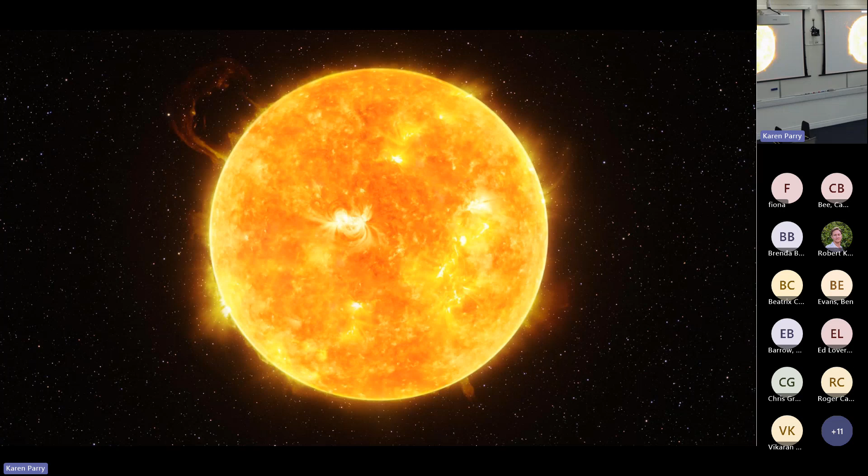So fusion, everyone knows, is the process that powers the sun and the stars. We're also all made of stardust. It's why we're all here. All the elements in the known universe, apart from primordial elements, were produced by stellar nucleosynthesis. And fundamentally, we can explain this by E = mc² as well. So it's the mass difference, or the mass defect, times the speed of light squared that is the energy released in a nuclear reaction you see in a star. And fundamentally, that's how we can use nuclear reactions, whether fission or fusion, to produce energy.

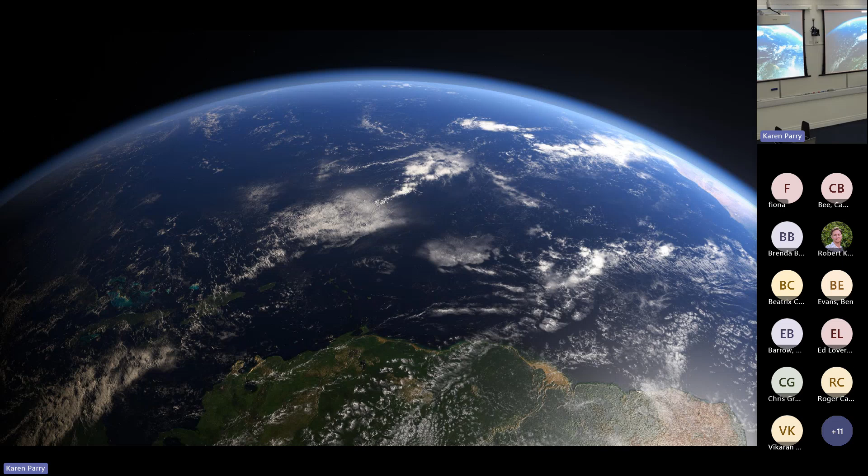So why do we care about doing fusion? Well, this thing's quite special. We've only got one of them as far as we can tell at the moment, certainly one that we can get to, and we've got to protect it. Because at the moment, we want to reduce the use of fossil fuels that fuel climate change. We want to reduce energy poverty, so bring up the standard of living, because there are some very nice bits of data out there that show the economy is massively dependent on energy. And if you've got abundant energy, then typically your country and your people are doing better.

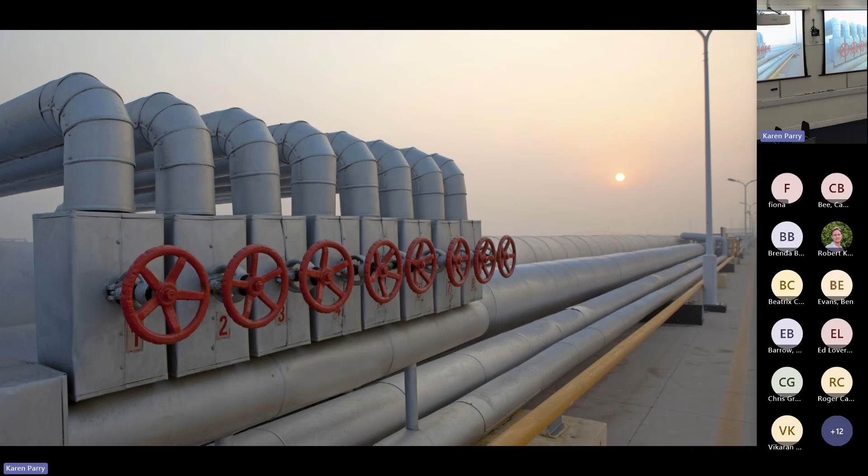This is definitely a big one now. Sorry, it's a slightly meta diagram, but energy security, which has become increasingly more important in a globalized, changing geopolitical climate around the globe. And we want to reduce that energy dependence on energy sources controlled by a few nations. So that backdrop, climate change, energy poverty, insecurity and energy dependence, is why we care.

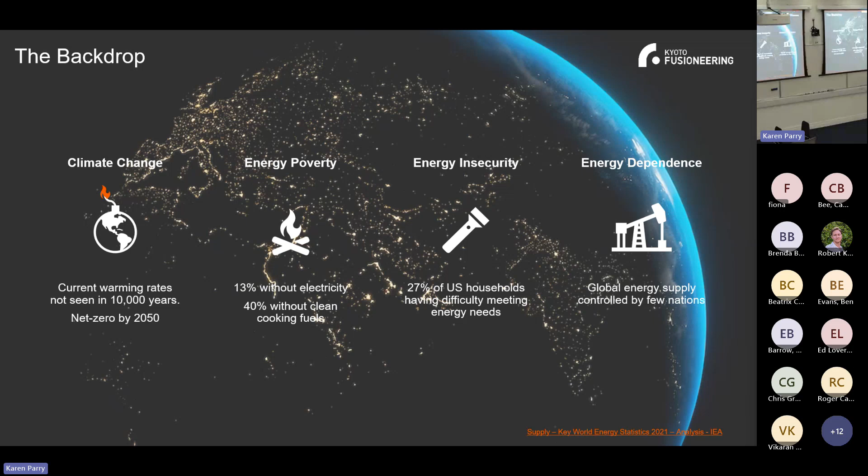But why fusion? Well, the opportunity is that we think energy consumption and economic growth can be boosted by having a plentiful source of energy, and that's fusion. Returning the carbon debt to the Earth: it's looking increasingly likely that we're going to carry on producing carbon dioxide and greenhouse gases from burning fossil fuels. There's a good chance we actually have to start putting that back into the Earth somehow, decarbonising the atmosphere. And you need a lot of energy to be able to do that.

And also we want to unleash the potential of our physical environment. I always say this technology is not the thing that sees us 50 years into the future. We don't get to fusion and go, oh, great, okay, what next? We've got to find the next thing. This is it. If we manage to crack this and we get it right, this could be the thing that sees us through the next millennia.

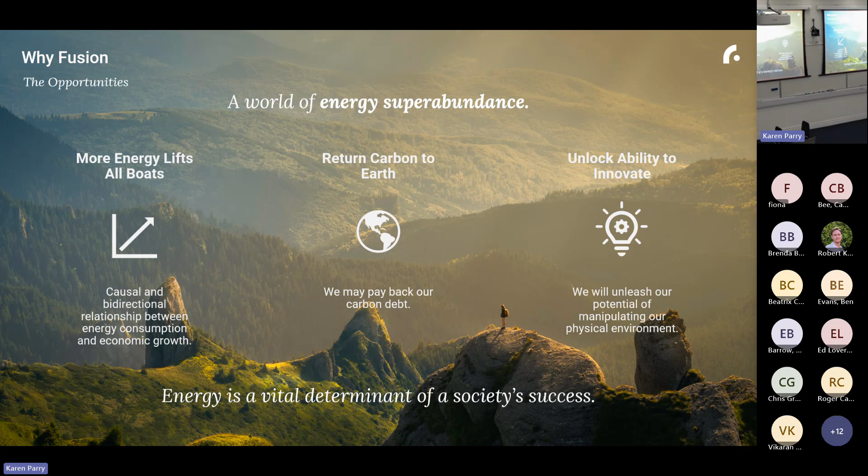So this really is an energy revolution that we're talking about. Now, that's the promise of fusion here, because we're not there yet. If we get it right, it could be dispatchable, could be clean, at least in point of use. Geographically independent, certainly to a degree. Sustainable. I think, again, these are all things that can be challenged. I frequently challenge myself. We can use it for more than electricity.

That's really important. So people talk about decarbonisation and reducing dependence on fossil fuels. Very, very hard to do if you look outside of the electricity problem. Decarbonising things like concrete production, steel production is really, really challenging to do unless you've got a huge amount of energy and process heat. Fusion can provide those things.

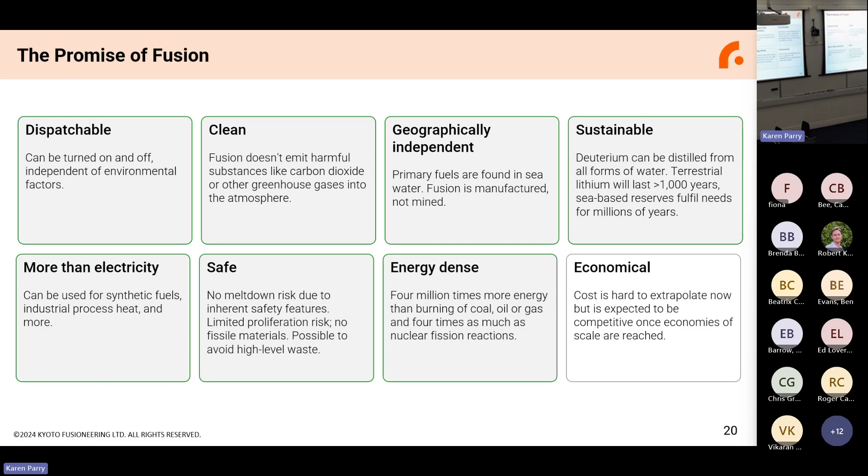It's inherently safe. Fusion's really, really hard to do, as we'll go into in just a second, and that also means it's really, really easy to turn off, because as soon as you switch off your power source, it's a passive reaction. And it's energy dense, super energy dense. So basically, you can produce 4 million times more energy than burning coal, oil, or gas, and about 4 times as much as nuclear fission per kilogram of fuel. And hopefully, one day we can make it economical, but that's very hard to say for now.

Okay, so how does it work? And maybe I can have hands up. Who is a physicist or a natural scientist in this room? Okay, so about half of you are going to have a good grip on what I'm about to say, but I'm going to go through it in lay terms and hopefully get everyone to follow along.

Okay, so we understand at school there are 3 states of matter, right? Solid, liquid, gas. Well, okay, there's a 4th one. If you heat up a gas, superheated gas, you can turn it into a plasma. This is where the ions and the electrons of atoms dissociate. These are probably LEDs, aren't they, realistically? But anyway, these are plasma lights in the ceiling. Let's just assume that is a plasma.

There are plasmas everywhere in the world, and we know quite a lot about them, but fusion plasmas are a bit different. So when you have a fusion plasma, you have to heat up the fuels to overcome a Coulombic barrier and actually collide together. So when you produce a plasma, you get this sea of ions and electrons, and this is actually charged. So you can act a magnetic field on it, and you can control what this plasma does.

Now in fusion, what you've got to do is create a plasma, and you've got to have that plasma last for long enough, you've got to get it hot enough, and you've got to get it dense enough so that reaction will happen. And those 3 levers, hot enough, long enough, dense enough, you can pull any two or three of those levers to try and get the reaction going.

Now what we've been trying to do on the Earth for the last 50, 60 years in fusion is try to get it above a certain level, which is about 3 times 10 to the 21. The product of these three things, a so-called triple product, has to get above a certain amount so that you have more energy coming out of the fusion reactions that you create by making it hot enough, lasting long enough, and getting it compressed enough to make fusion happen. And you need to go a lot above that to then get way more energy out than you're putting into it. Did I explain that well?

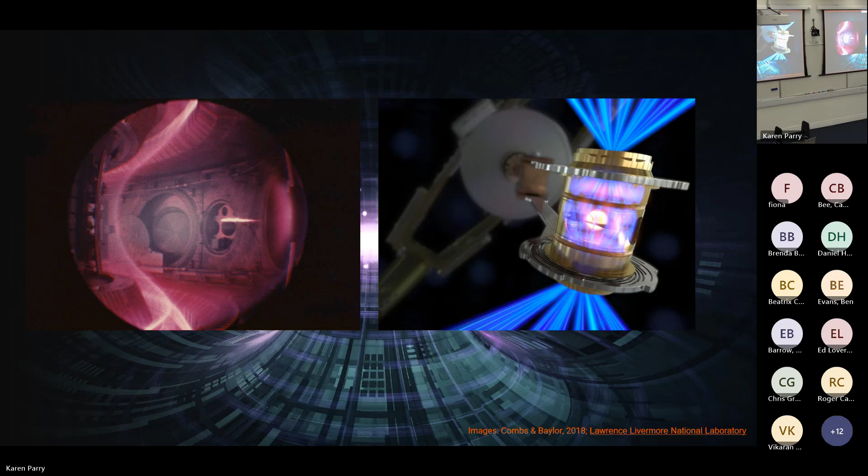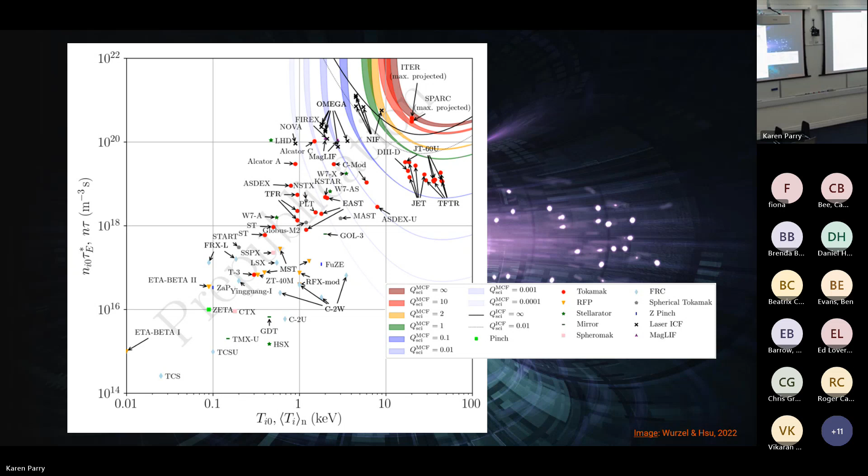Now, getting past that point has been regarded by someone that I know at MIT, Professor Dennis Whyte. Some of you may be familiar with the name. He calls this the Wright brothers moment. This is the moment the wheels are off the ground, that we know flight is possible. This moment of getting more energy out than in is that wheels off the ground moment.

Still a long way to go until we've got a commercial airliner, right? The Wright brothers didn't fly their first machine and go, great, now we're going to build a Boeing 777. They had to go a long way to get there, but it showed that it was possible to do it. So it's a really important moment.

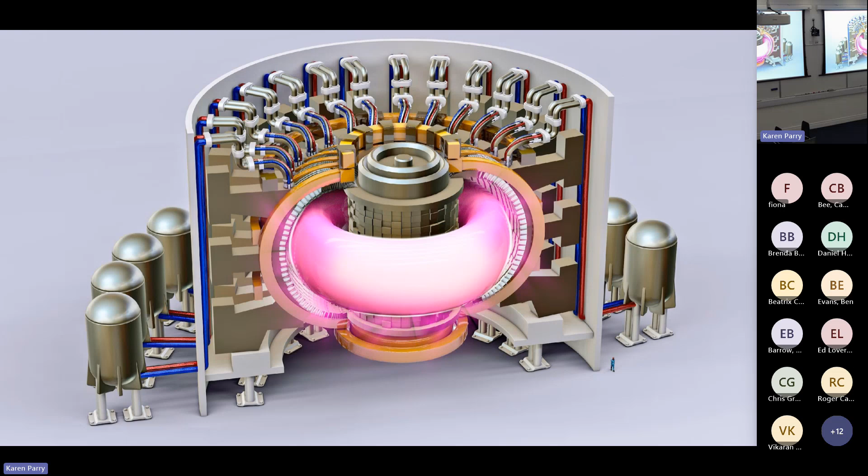And this is a device from 1954, I believe. This is something called the Zeta machine, which was based at Harwell, I believe, just down the road. And this was one of the first machines that produced some really good results. Then they moved on to tokamaks, which is a Russian name. I'm not going to pronounce it because it's really, really challenging, but it's four different Russian words combined together. And this got adopted as one of the best configurations for doing plasma confinement from a magnetic confinement approach because it was getting good early results.

And we ended up with JET, which some of you may have seen. If you haven't, please go visit JET at Culham down the road, which is an amazing thing to see, although it is now actively being decommissioned, whereas it ran for a very successful campaign for a long time. And finally, we got to this idea that actually let's keep building tokamaks, and we came up with this, which is a schematic of something called the ITER project.

So ITER is a tokamak based in the south of France. This is a tokamak that involves China, Russia, the US, Japan, South Korea, the entire European Union, sort of the UK a bit at the moment, but not really, but kind of, yeah, we put a lot of money into it, but we came out of the agreement, so we're working out ways to get back in. And basically, it's an international project, a little bit like the space station or CERN.

It's a science mission, but this was formally the way to get to fusion. That's important, because I'll come back to that later. So this was stipulated to be the pathway to fusion. We've got to go via this machine, then we're going to get to the next phases. Okay, so this was essentially going to do that Wright brothers moment, magnetic fusion.

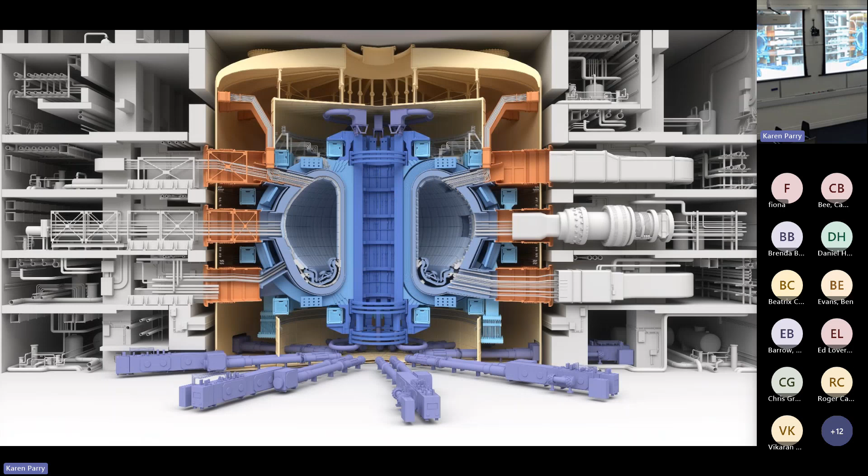But currently it's not constructed, and it's currently due to go first plasma in about a decade from now. And it was originally due to be first plasma in 2008. So it is a project that is about 30 years delayed. Bit of a problem when you're trying to move fast.

Enter something else exciting: the laser side of the house. As I said earlier, they're trying to get to really high density, high temperature plasmas. In 2012, they ran the first shots on something called the NIF, the National Ignition Facility in the US, in California. This facility was supposed to provide that Wright brothers moment in 2012, and it missed it, and it missed it again, and it kept having problems, and there were delays, and so on and so forth. Hold that thought for a second.

So where are we at in terms of making that progress? Remember that graph I showed earlier with the progress? This is kind of the wishy-washy plot showing we've made real progress towards that point of fusion power break even, that Wright brothers moment. Then since then, we started building the ITER project. When NIF got delayed, things went a bit slow, a bit stagnant. We stopped making that progress towards fusion power break even, and we started to stall.

That is until 2022, when the US Department of Energy, by the NNSA, announced that they had achieved this break even on the NIF. So a decade late, but they'd done it, and it matched the models. And they did it again and again and again. I've spoken to Tammy Ma, the director, and she says they've done it again and again and again, actually. So they've done it 7 times now, all with planned experiments, getting the results they expected.

And I think the latest results actually see them get something like 2.7 times more energy out than they put into it. And you're thinking, great, so we've done fusion, that's it.

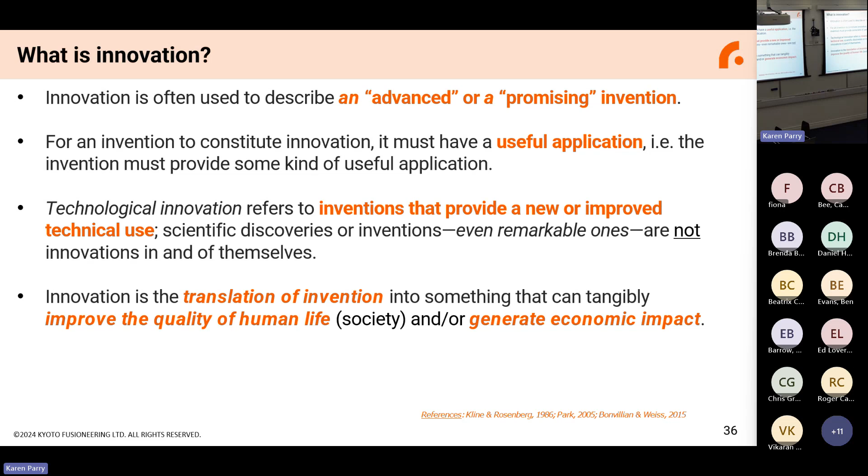So what does technology to market look like? We're charting the path of technology to market—it looks linear, right? We go from science to technology, to application, to market. Typically you have to overcome several peaks, where there's a lot of effort and money you've got to put in to prove that your technology can stay within the laws of science and that it works.

Then we say, well, we've got our technology, and we think it's got a really useful application. You run an experiment, do that again—another uptick in resource needed there. And then finally, you show that you can make it commercially viable. You have to put a lot of work in to make it economic. That's the typical process of diffusing technology to market.

Now, it looks like a linear process, but in reality, if you look historically at all innovation throughout history, it's dynamic. This should be viewed as a dynamic system, not a linear process, because there are feedback loops that link from all stages.

This seems very obvious, but a lot of people haven't thought about this when actually deploying stuff in the real world. In a successful fusion innovation ecosystem, you need to understand the requirements of each part of the innovation ecosystem, who the actors are—public, private, supply chain organizations, regulators, etc. There are also processes at the front end, the R&D side, and the back end, the application and market side, and you need to think about how those drivers impact other parts.

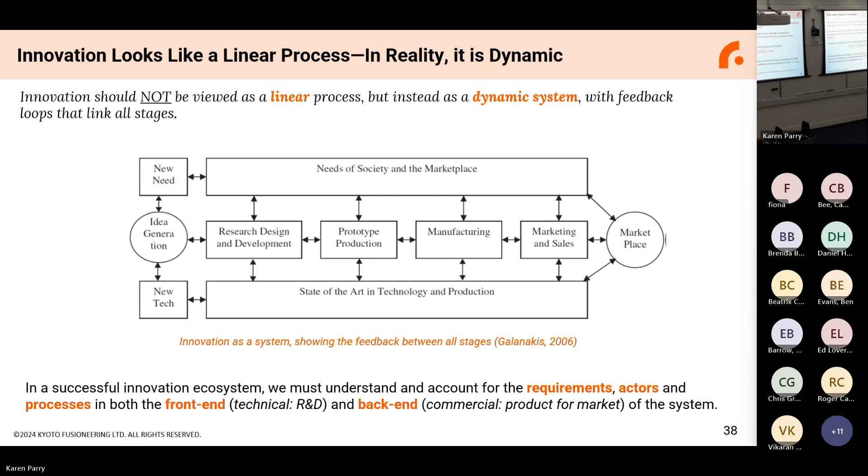As I said a moment ago, historically, advanced technology missions that had a high degree of technical risk but potentially high societal reward were developed on a linear model, more or less. These missions are almost exceptions to the rule because they required significant investment, and the goal was often not commercially oriented.

So money and time had to go into things like the development of nuclear fission, which was really a bit geopolitical at the time. Certainly the Apollo missions, and also the internet, interestingly, came out of DARPA in the US, with roots to Oxford in the UK as well.

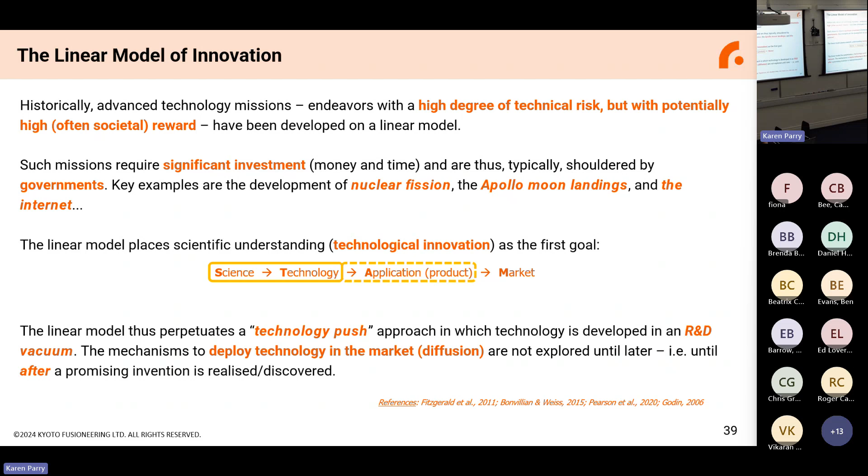Fundamentally, what happens is you go from science to technology and you have what's called a technology push approach—you say, I've got this thing, it can do this, and we need to do it. So we've got this thing, we can land it on the moon, and then we've done it, which has now spawned an interesting commercial space race. But that took a very long time to materialize. They still did the thing—their mission, their application, was landing on the moon. In that case, that was the innovation: the US getting to the moon.

So how does this apply to fusion? What I contend is that, whilst fusion has been the subject of major R&D for the last 70 years - 1952, I think we really began looking into fusion, but that was actually a little earlier if you look at some of the fundamental physics that went on before.

National labs ran the show. Private fusion companies didn't really exist - I'll come on to that again a little later. But naturally, those labs are going to be geared towards the front end of the innovation, right? They're going to be thinking about research and development to prove the science, and to understand the technology in more detail.

They were not thinking about commercialization, and that's fine, that's okay. But with those focuses being on that fundamental research and some of those mission-led experiments, including the likes of the ITER program - you see on the right here, another schematic - that was the primary mission.

It was, okay, well after we've done that, after we've done ITER, after we've proven NIF, we'll then start thinking about the next stages. We'll start thinking about those applications. We're not going to design this for those applications - this is a science machine. It's going to prove the science, we're going to understand some of the technology, we're going to progress it along. And then later, someone will come along and innovate, and we'll do it that way. So it's very much on the linear model.

Now, what I contend has happened over the last decade or so, and I think we're still in it but we're at the tail end, is that we've undergone a paradigm shift. Over the past decade, we've seen this science-driven model challenged by the emergence of 40 privately funded fusion companies. These have raised collective billions of dollars in investment - I'll show a graph shortly. And they promise to basically rapidly commercialize fusion technology. Now, rapidly in this sector still means probably decadal, but interesting. It's more interesting, in my view, what they've done to the state of the sector.

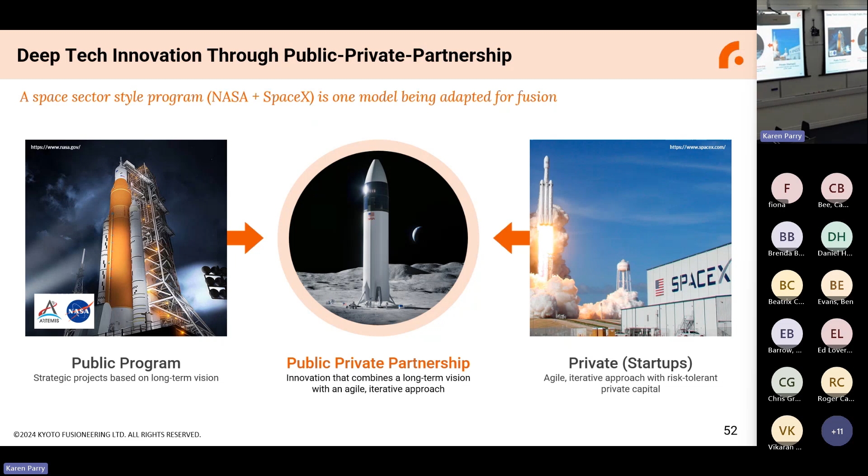But I think public-private partnerships, in the US in particular, but certainly elsewhere, in China too - these two bleed into each other anyway - the public program and the private companies are starting to work together under official frameworks as well. So something called the milestone-based program in the US, and it's modeled on a space sector style approach where NASA and SpaceX work together on the NASA COTS program to try and get innovation happening faster.

Different governments have got different approaches, but the UK, the US, and Japan have all announced new strategies for fusion over the last couple of years. China's also got one too, and you'll be unsurprised to hear. Governments have adapted. They've started to realise the private sector can't be ignored, and the public sector should be leveraged for the benefit of fusion energy as a whole, the benefit of their nations. And these countries are all working quite closely together. This has stimulated a lot of international collaboration. There's an official partnership between the UK and the US, a collaboration agreement between the countries.

One is coming with Japan, I keep getting told, but it's been about a year since I was told that, so still waiting to see what happens. I think the number of elections on both sides have caused a slowdown. And there's actually a summit in Italy next week with the G7 specifically on fusion, so we'll see what comes out of that.

Unfortunately, with that collaboration also comes competition. So the US and China are starting to draw swords on the fact that one of them wants to get there first. They're not sure which one it's going to be.

So is there a new space race going on with fusion? Or is it more like the race to get the vaccine? I wanted to look at this through two lenses. Firstly, through the geopolitical lens: fusion's going to turn into a race internationally. Will we develop it more like the vaccine, where it's actually, let's all get this together, let's all work on this, push in the same direction for the betterment of humanity? Or will we actually end up competing and trying to have primacy as an energy technology? Because this could be the thing that controls geopolitics around the world, just like oil does today.

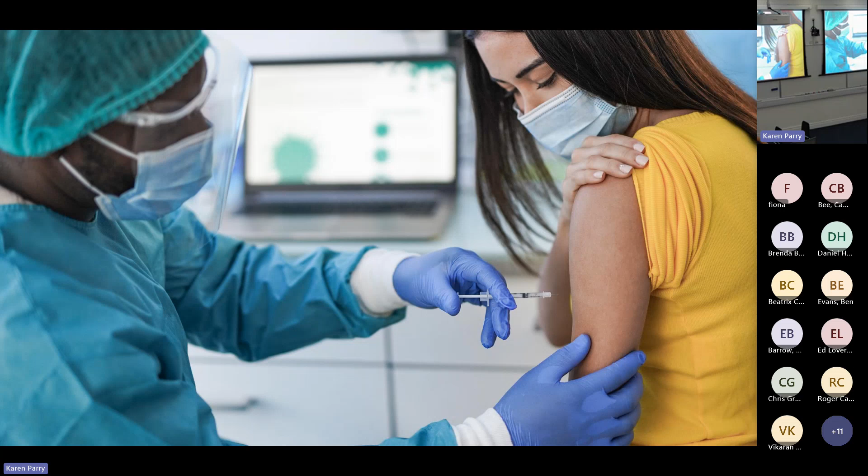They started working out how to get jabs in arms, how to mass manufacture things, how to get licensing done quickly, while they were still testing the efficacy of the drug in the first place. They weren't sure those vaccines were going to work, but they made sure that if they did, they were ready to go. And that's kind of what's happening in fusion now. So there's a couple of interesting lenses to look at: there's a geopolitical lens, and there's the mission itself and how we approach it. And again, I sense fusion is a bit of a geopolitical race right now, certainly becoming so, but also that this is not necessarily a bad thing for the innovation ecosystem as a whole.

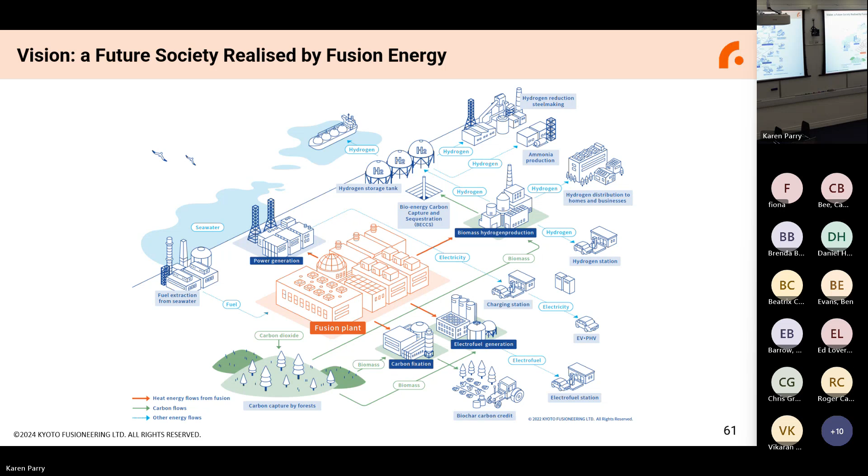We think producing things like hydrogen for everything from ammonia production all the way through to hydrogen reduction in steel making could be important. We think looking at biomass gasification, where we're actually taking carbon out of the atmosphere, could be important. And there are various routes in which we think fusion can have a major impact on humanity.

Our mission is to enable the fusion energy era. So this blue bit in the middle is NIF, it's ITER, it's whoever's developing a plasma. We aren't developing our own plasma. We're working on the bits on the outside. Probably the most instructive piece. Oh, and I should say, principally, these can be divided into 3 areas.

Plasma heating systems. So this is the only area of our technology that's magnetic confinement specific. So if anyone's working on a magnetic device, this system's relevant. If you've got a laser-based approach, this thing isn't going to help. I'll explain why later. And then also the thermal cycle, this is how we actually take energy and make it useful, use the energy for hydrogen production or something. And then the fuel cycle system is the piece that actually fuels the engine.

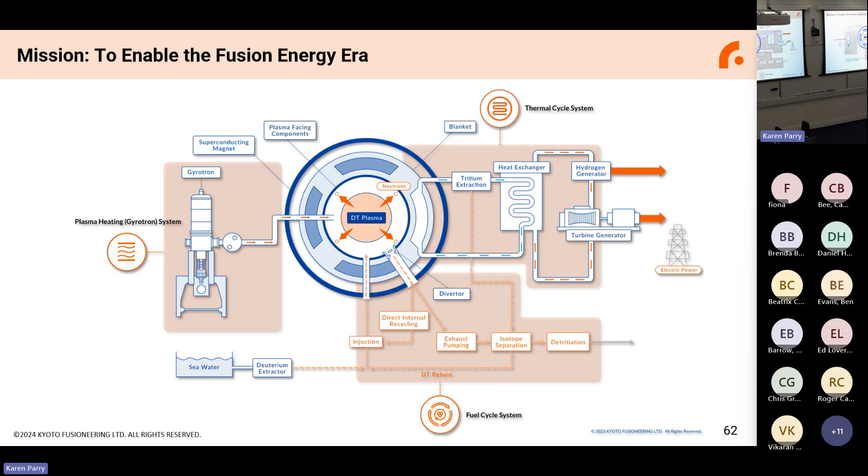Now I've got an analogy here for you, which is the first time I've tried it publicly, but I have used it privately a few times and it seems to have resonated. So I hope this is going to help you understand what we do. So think of a car engine, or rather the exploded BOM of a car engine. So that's bill of materials for engineers in the room, not bomb as in B-O-M-B.

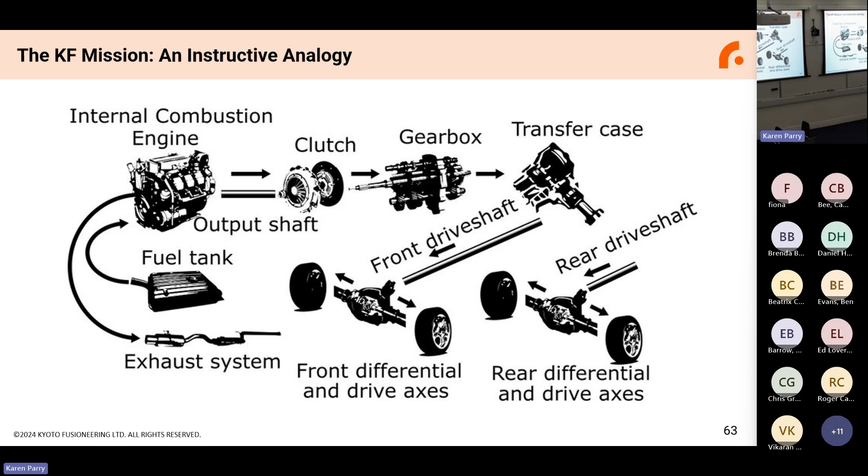So what you have is the internal combustion engine. And then you have things like the clutch, the gearbox that make up the drivetrain, and then you have the chassis, the exhaust system, the fuel tank, and yada, yada, yada, and all the bits in between. Right? Let's think about fusion as a car, and this is one of my favorite cars, by the way. I'm a big fan of cars, and it's a Japanese car, so there's a link there as well somewhere.

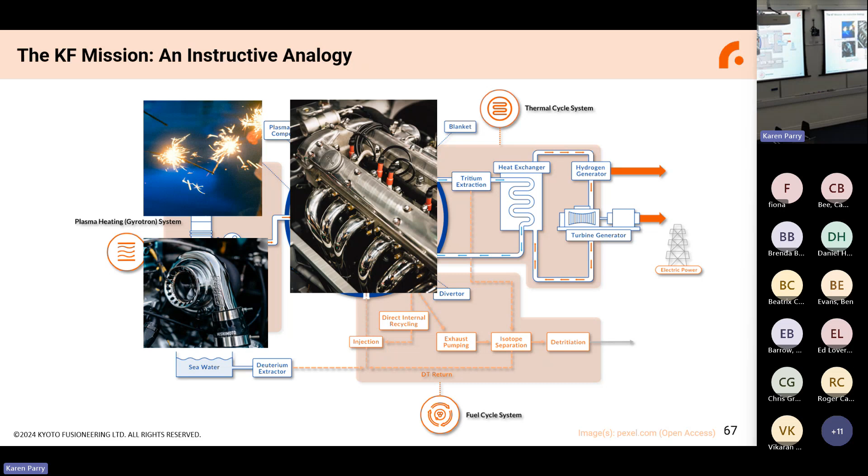So if that's the engine block, then this piece over here will be kind of like the spark plugs or the turbocharger or the air intake. Okay, this is the bit that provides the energy to the engine to get it going. Okay, you have to stretch the analogy a little bit because, of course, we don't have spark plugs in fusion. We have a plasma. We actually have no air inside fusion systems. They're normally vacuum chambers, very, very low pressures.

Thermal system, that's your gearbox, your drivetrain, probably your chassis. Maybe a diff, right? Okay, this is the bit that actually transfers the power to the wheels, so you can actually operate your car, make it move, and make it do useful work, right?

And the final piece, quite obviously, and sorry, these are all the free stock images I could find today of a rusty old exhaust on this one, an exhaust and fuel tank, and basically this is how you fuel and inject the fuel and exhaust the fuel from your fusion reactor.

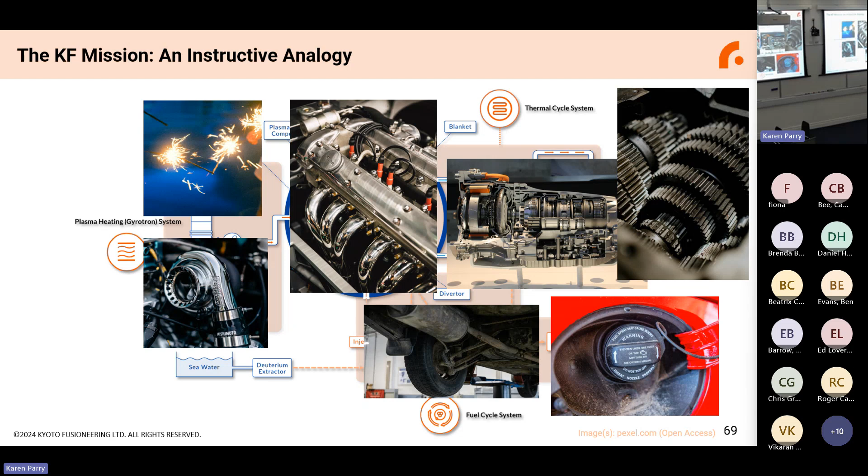So what you've got there: engine, fueling the engine, exhausting it, taking the engine, the useful work, and doing something useful with it, making sure you've actually got the ability to ignite the fuel in your engine in the first place. So that's what we do as a company. The only bit we don't do is the engine.

And before I get on to what our business model is, again, this was something that I was forced to do when I started doing my research, because as an engineer, you think you know what a business model is, and then you go and read about it, like, yeah, this is more complex than I thought it was. So I'm going to do a couple of definitions of business models for you. The business model is a plan for the successful operations of a business, identifying sources of revenue, the intended customer base, products, and the details of financing.

This is important. There's a lot to unpack, and I'm not going to do it now. You've got to make sure that what you're making is actually needed. You've got to make sure you can actually make what that thing is, and you've got to be able to actually fund it as well in the first place. So you've got to link these things up, as I said earlier. This is what private companies do. We are not here as a research organization. We are here to commercialize research.

Now, why is it important? Well, getting the business model and technology strategy right in the context of something like fusion is important, because to actually achieve something commercially viable, you've got to have a competitive advantage over your competitors and over the market. And that's what we think we have. Because what we do is we're running perpendicular to those in the sector.

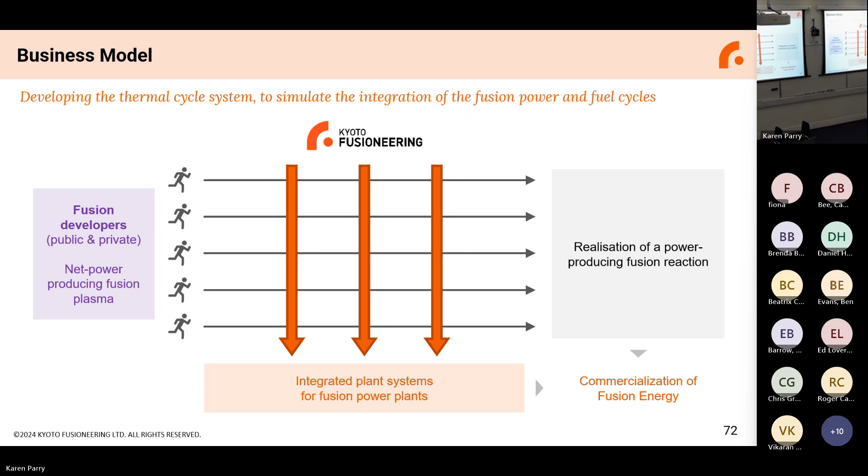So in simple terms, if you're a plane company, we're making the engines. If you're Boeing or Airbus, you don't make your own engines. Rolls-Royce or GE make them for you because they're the best in class. And they collect their supply chains to supply all the turbine blades and materials and filters and so on to make that happen.

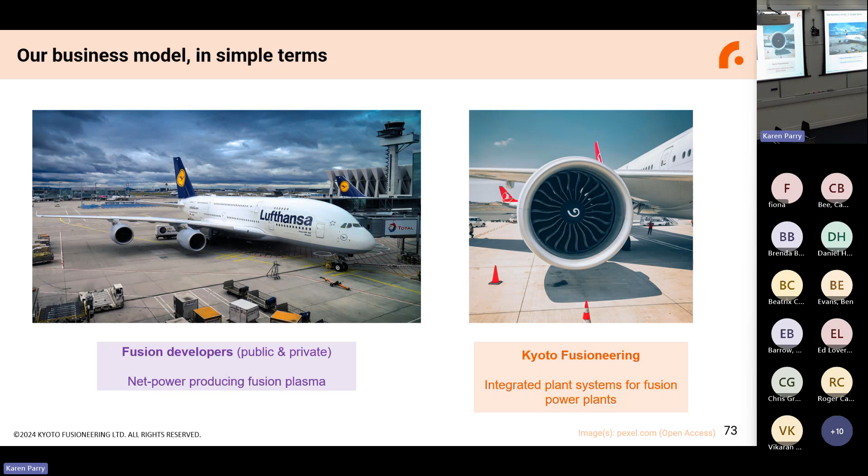So part one, this piece, the spark pluggy bit that I spoke about. Now, a gyrotron is a machine, a piece of kit that you can use to heat a plasma. So you can heat plasmas through something called electron cyclotron resonance heating. So what you do is you fire microwaves at a certain frequency at high power into a plasma, and you can transfer the power from that microwave beam into the plasma, into the electrons.

You get the frequencies right, you can heat up those electrons enough such that they're so energetic that they can pass their energy onto the ions in the plasma. Those ions in the plasma are important because if you get them to a high enough temperature, you can actually get the temperature of the plasma to make fusion happen. So you can see how important this technology is. Now, there are other methods of plasma heating. This is not the only one, but we think this is the one that can be most efficient.

And we're very lucky, our CTO is the world's leading plasma gyrotron specialist. So we're very happy to have him on the team. His name is Keiichi Sakamoto. We are already selling these technologies. We've sold 2 to the UK National Programme and 1 to a private company in the UK. We have gyrotrons at various frequencies, about 1 megawatt output power, and a wall plug efficiency of about 50% at the moment.

We can go all the way up to continuous wave operation on these. So we have these as products available now. If you actually are interested in buying a gyrotron, please come and order. But please bring your checkbook and we can talk.

But fundamentally, we have sold 8 of these so far. So this is the majority of our revenue because this is what the market needs today. So we've taken a technology that we knew would work, and we had the understanding of. To actually take that to market was more challenging. You have to jump through qualification hoops, you have to do quality control, you've got to get your supply chain organized. But now we have a very robust setup to be able to sell these into the market.

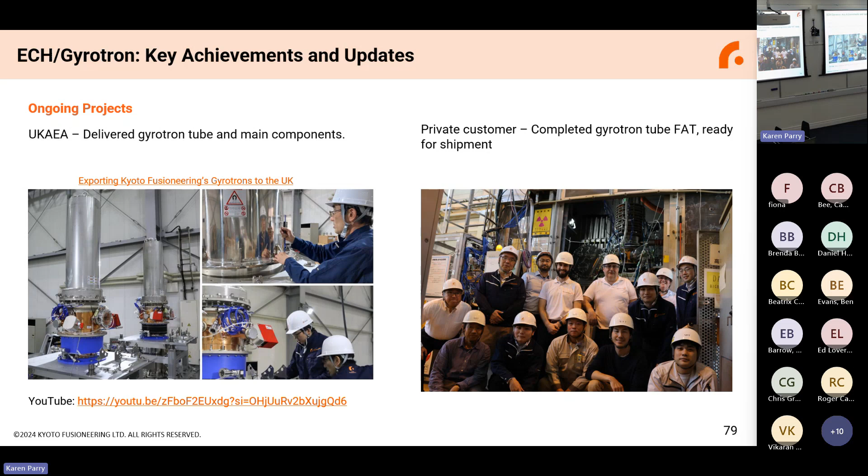We're also working on the R&D side. We've done some high voltage power supply R&D in Japan, working with a Japanese company, Nichicon. And we're also now working on a higher frequency gyrotron. So if you know some of these companies around the world that are looking at these high field devices using stronger magnets, if you go to strong magnetic field, you typically need to go to much higher frequency of gyrotron, so possibly upwards of 300 gigahertz. Now, at the moment, that's very challenging, but we're looking into ways to be able to increase that frequency to see if we can actually heat high field plasmas.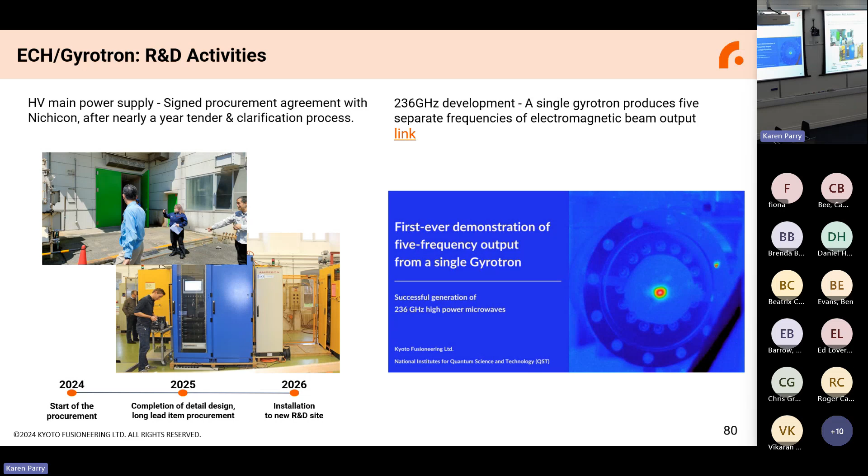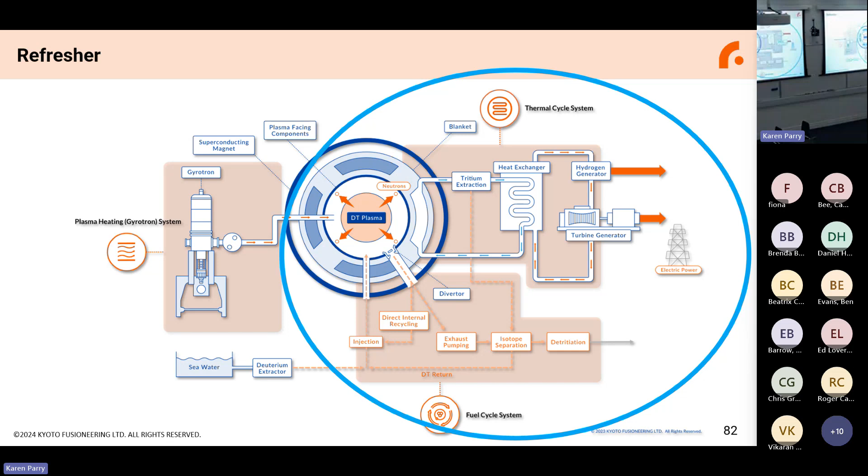So that's the first part. Second part, I'm going to group into one because they are very much overlapping. So this is the thermal and the tritium fuel cycle piece. And what we've got is something called the Unity program, which I hope you're going to love. So remembering this is this piece, and just for reference, it's that drivetrain, powertrain, power delivery, useful work, and the fueling piece. But first, we're going to take a step back, and I am actually going to teach you some fundamental fusion engineering here because I think it is important.

So I talked earlier about a fusion reaction, and we're going to get a little bit more detail here. So I didn't mention the specific fuels, which in fusion are deuterium and tritium. Now, the reason they're deuterium and tritium, you can ask me afterwards if you're interested, but fundamentally, these are the easiest fuels to do fusion with. So we make fusion happen, yay, by some form of magic, and then we produce helium and a neutron. Now, the helium remains within the plasma because it's a charged particle. We have to exhaust that out through something called a divertor in the magnetic fusion device. In a laser machine, you still have a cavity chamber that you still have to get it out of.

But anyway, this is the important bit for us as a company, because anyone dealing with the plasma has to get that out and actually use the energy from that in the plasma for their concept to work in a certain way. Okay, but this piece is uncharged. Neutron is an uncharged particle, so it will go anywhere. And this goes out of your plasma and into something called a breeding blanket. Now, does anyone know what a breeding blanket is? Okay, there's a few in the audience.

Right, so what a breeding blanket does, when we talk about how fusion could be a self-sustaining fuel forever, the breeding blanket is the thing that does that. At the moment, you're burning fuel, and you go, well, where's it gone? How can this be sustainable? Well, this one is 1 part in 6,700 atoms in water. So, my water on the table, there's a lot of deuterium in that I could get. That one isn't. We can produce it from lithium.

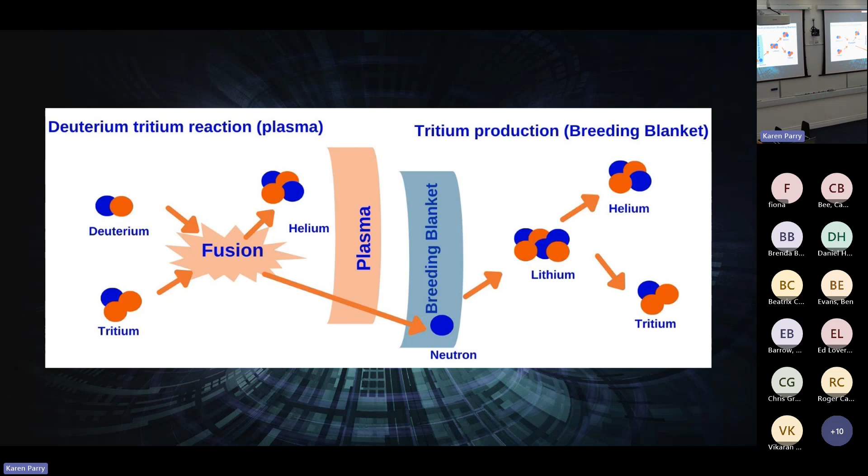Fundamentally, in graphical form, this is how it works. Well, who did that? That's wrong - that should be helium-4. Sorry, that's not me, this is my colleague. I'm showing my hand that I didn't make these slides, but I really like them. So other than that, they're really good.

Now, this tritium piece is a critical path challenge for fusion. It affects every single major system, and it affects performance, safety, and cost. Every time you want to move fast in fusion, tritium will be the thing that applies the brake. You haven't got enough of it, you can't produce enough, it's too expensive to get in the first place, it gets trapped in materials, and so on. We can go through those if you're interested.

It's not something you bolt on either. You hear a lot of people in the fusion sector saying, oh, well, we'll do the fuel cycle afterwards. No, this is integral to the operation. It's not an afterthought. It affects how your plasma operates, it affects which materials you can choose, and it affects how you design your breeding blanket.

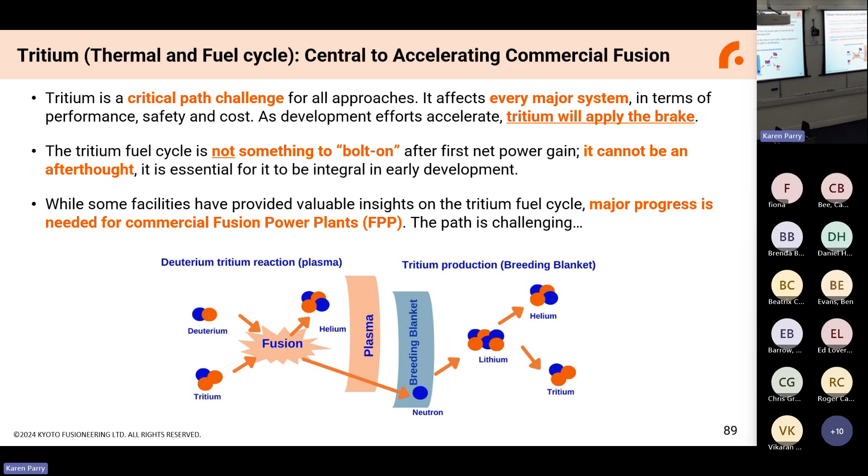So this is something that we at Kyoto Fusioneering value very deeply, and we say this is one of the most complex engineering systems, not just in the fusion sector, but on the planet. It's a very complex piece of kit. It gets very hot, and it's very spicy from a radioactivity point of view as well. We're going to design it well. It's a complex system, so whilst we've got some facilities that provided insights into materials development, or how you actually do the fluid flow around a blanket system, or how you extract your tritium from the blanket, we've still got a lot of work to go.

I'm not going to go into this diagram, but I've included it because there's a link to our paper on this topic, and you can find some more information. We've actually got a follow-up paper to this coming out later this year as well. But basically this is just to signify that your blanket system, which I just mentioned, is here.

I haven't even talked about the fuel cycle yet. You know, I mentioned that car exhaust system - well, in fusion, because you don't want to lose your tritium, you don't just release it to the environment like you do with a car. You don't just get rid of your NOxes and your sulfur dioxides and then let the rest go into the environment. You actually have to keep your tritium in the system.

So when you exhaust it from a fusion reactor, follow my hand, hopefully this is helpful. You've got helium, you've got unburnt fuel - deuterium, tritium - and you've got particulate matter from inside the vessel. You've got to clean that up, you've got to separate it, you've got to store it, you've got to get rid of the nasty stuff. You've then got to refuel again, but sometimes you just want to store it for a while - sometimes you've got long-term storage. I'm not going into details here, but the point is it's a complicated system. This is not just a fuel cycle like you think of in a car. Okay, that's the key takeaway.

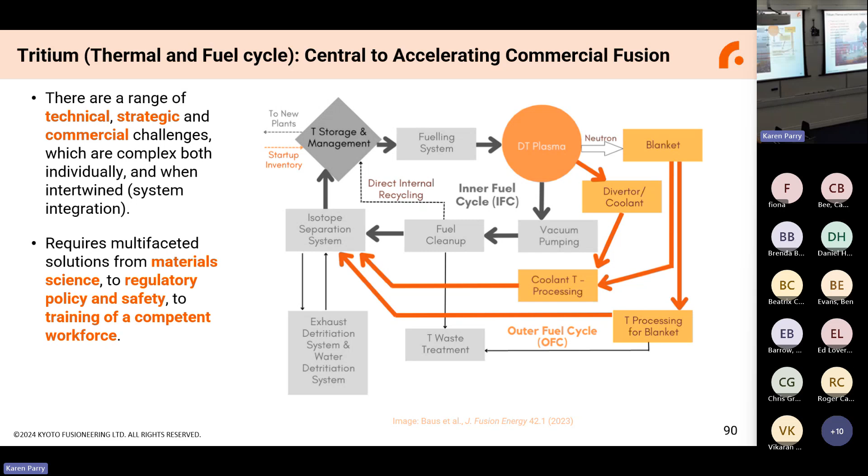Okay, so on to Unity. What we're doing is trying to crack the fuel cycle, both the tritium fuel cycle and the thermal power cycle. The interlinking piece there, if you like, is that blanket piece.

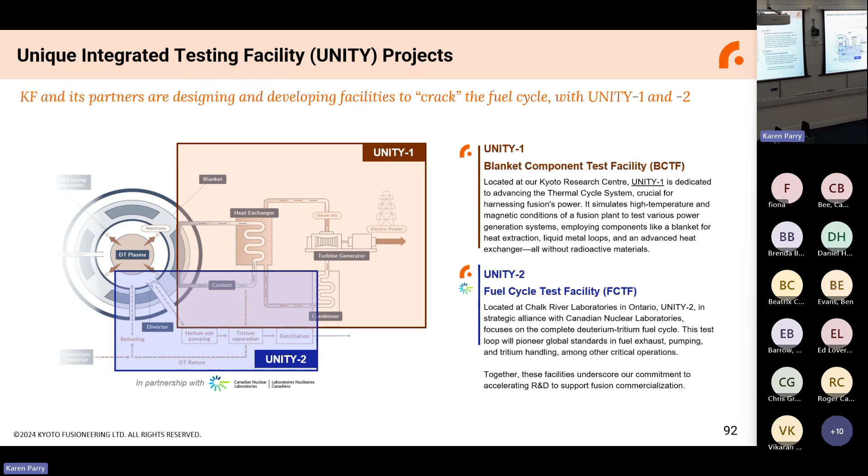So we're building two facilities called Unity 1 and Unity 2. We had the original names - Unity was one program initially, and then we split it into two for reasons I'll explain. Then I said, oh, we should do a Unity 2, and that name stuck. So be very careful when you're naming things, because names just stick if you say it first time.

We've got a liquid metal inventory containing lithium, which is the breeder we're going to use in that blanket. And we're going to have things like a heat exchanger, a hydrogen extraction system, an impurity removal system, high temperature test sections, and magnetic field test sections, so we can test what happens to the fluid flow when it's under magnetohydrodynamic stress from magnetic fields.

This is something we think we can really make use of to actually test technologies and say, yeah, we've not only looked at this in isolation, we've looked at these technologies in an integrated setup. We've understood how they've worked, and even in some cases qualified in the first stages what that technology needs to do, so that if a customer comes along and says we need to know how to do that, we can say we've got experience with that. And if we don't have experience, we can run an experiment, or maybe we decide we want to do something slightly different in the future, running, for example, with a different working fluid.

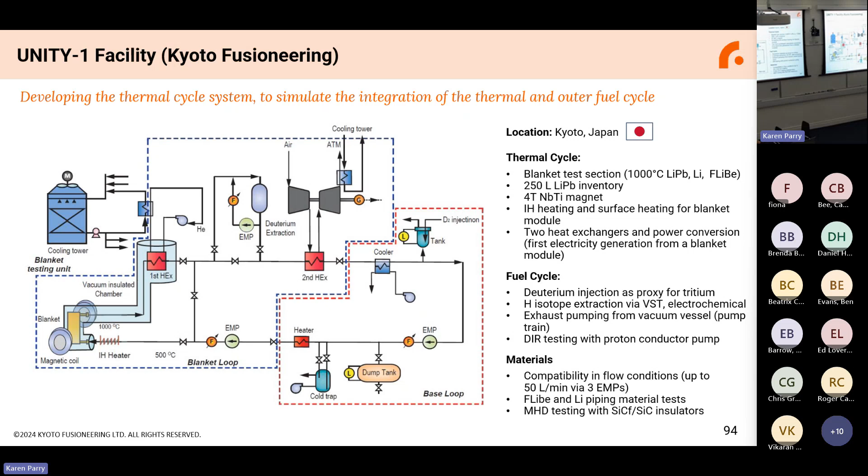Here's the 3D schematic of what it's going to look like, and yes, before you ask, the pipework is orange. We made an executive decision that it would be - it cost money, but we decided it was worth it. So this is what it actually looks like, and it's slightly more red than orange. I was kind of disappointed it wasn't luminous orange, but anyway, this is the facility, and the commissioning of the base loop is now completed.

So this pipework you see here, by the way, the pipes are really thin. There's a lot of insulation around the piping to keep it hot. This has got a liquid lithium lead, as I said earlier, as the breeder flowing through it.

And we've got things like a tritium extraction system, testing how we can get tritium out, but this is a non-active facility - there's no tritium here. Luckily, you can use deuterium as a proxy. And as I said, we've got that magnetic field, the heat exchanger installed in there as well.

The idea is to actually demonstrate that you can get heat from that lithium lead loop through a heat exchanger into helium and actually run a steam turbine. In the first instance, not with helium, of course, that'd be with water, but also we want to run a Brayton engine off this thing. Sorry, I may have gone a little deep there, but it's hard for me not to go deep on this - it's a complex facility.

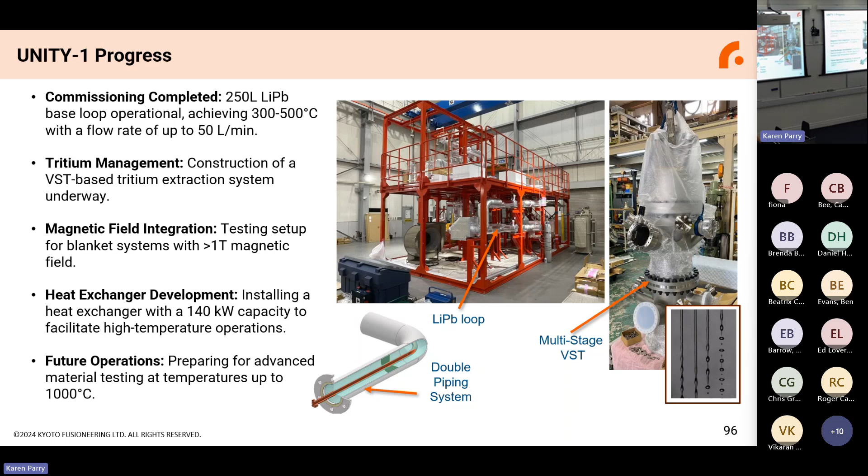And then on the fuel cycle side, what we want to do is test the other part of the system. About 2 years ago, almost to the day, I was, of all places, in Romania at a conference, and I had sushi in Romania, which was very good, actually. That's probably not the normal thing you would do, sushi in Romania.

And I was with a colleague from CNL, Canadian Nuclear Labs - this is the government's laboratory in Canada. For whatever reason, and I can dive into it if you're interested, basically Canada is the world's leader when it comes to tritium technology.

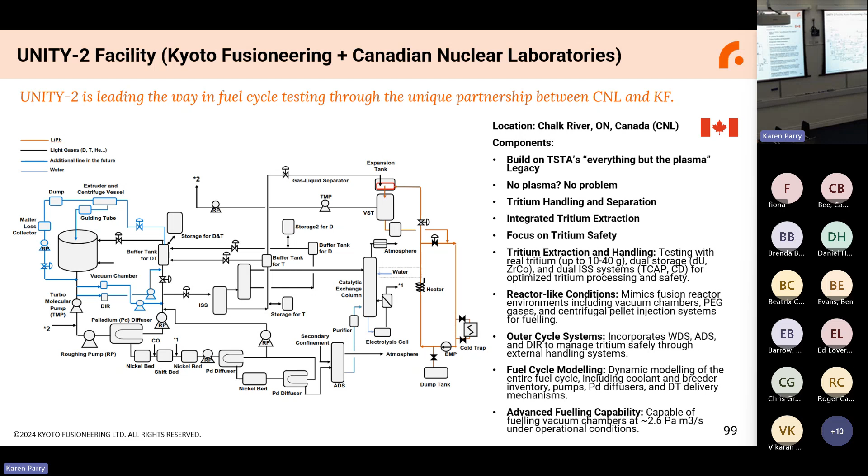So we had a conversation, and I said we should be doing something together because you guys have got all the tritium, you've got all the knowledge, and you've got the site. Could we do Unity 2? And he said yeah. So we set up a call, talked about it, got our business team involved and their business team involved, and got all the legal stuff done. Then we formed a JV, a joint venture. So we actually have now an official joint venture with the Canadian government, and we're building Unity 2 in Canada.

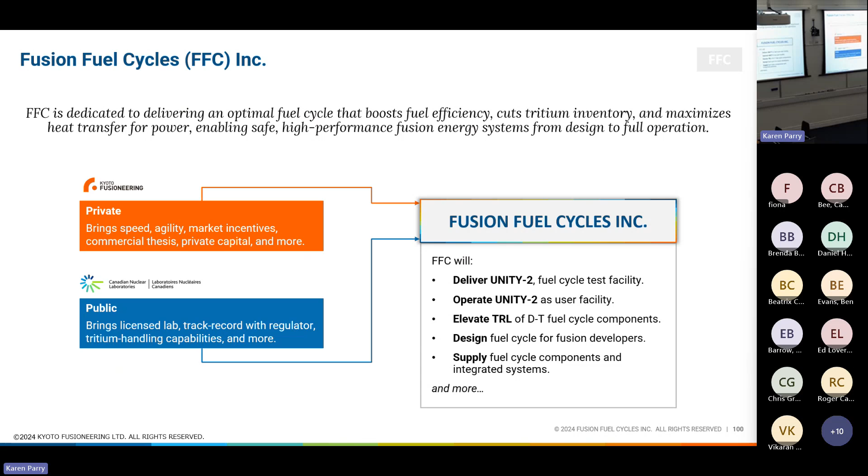So the idea is we deliver Unity 2, operate it, and then we'll supply fuel cycle components to the industry. So we've joined forces between Japan and the Canadian government to do that. Not the Japanese government, sorry, to be clear, our company in Japan and the Canadian government to make this happen.

What we want to do is close key technology gaps in a bold timeline. So again, going back to that gyrotron piece, we are developing technologies that people need tomorrow, but we're working on them today. We're also doing the integrated pieces of work and the really hard technology problems of tomorrow so that we're ahead of the game. Hopefully this illustrates the answer to your question earlier, that we're working on the next steps whilst also making sure we've got things people need now.

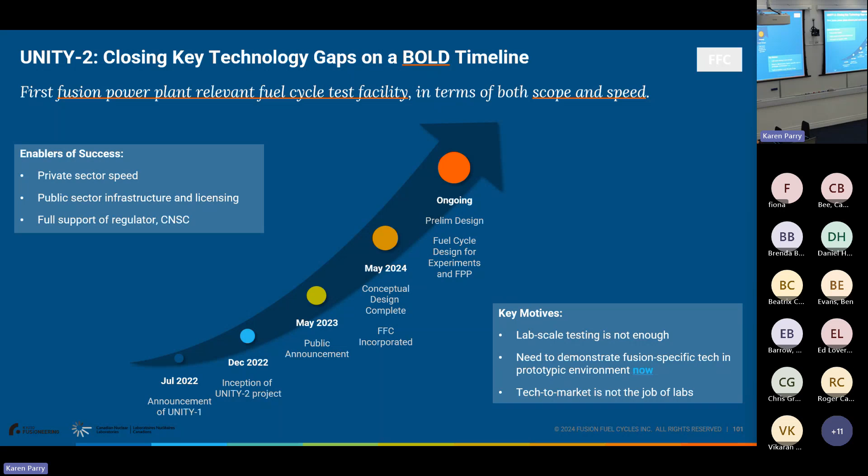Things people need now, for example certain pumps, membranes, diffusers, certain materials, and we have a supply chain orchestrated through the fact we're building facilities like this, that we're able to bring together to deliver stuff to the market today whilst innovating the next steps. I used that word very choice earlier.

This is the building it's going to go into. Another reason to go there was, as I said, they have the site, they've got the license, and we're all set up to do it.

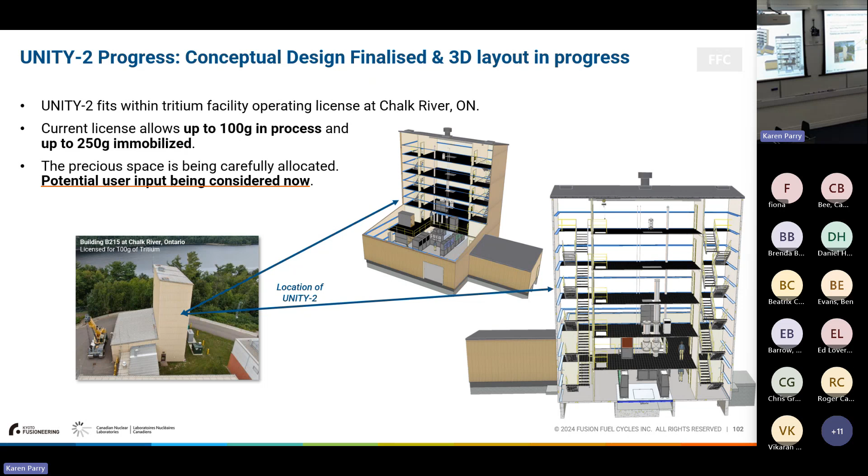If you walk down this corridor, all your tritium is there. So it's already on site, and that building is licensed, and we've just had the license - the regulator has said yeah, you're allowed to do Unity 2 in there. It hasn't changed the license case fundamentally. You're still using tritium, you're still using some of the technologies.

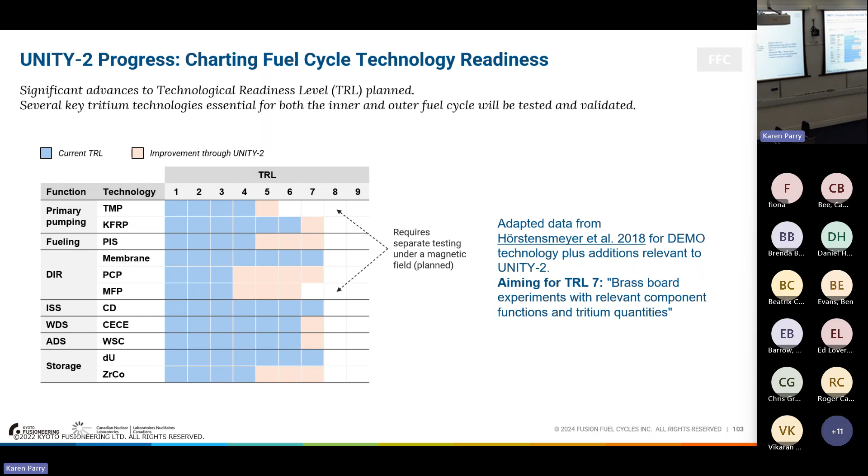Fundamentally, what we want to do is take the technology readiness level from where this blue area is and move it up towards pink. So this is the ultimate mission of Unity 2, to get to the point where we say, yep, we understand most of the tritium fuel cycle required for a fusion power plant, such that we could actually build this thing.

And it's on schedule. I think we're actually about 4 weeks behind after a year of official project planning, so I think that's pretty good going for a project of this size. As I said, we've got the Canadian nuclear regulator confirming the scope's within the existing license. I think also the conceptual design is now complete, so I should tick that one off as well.

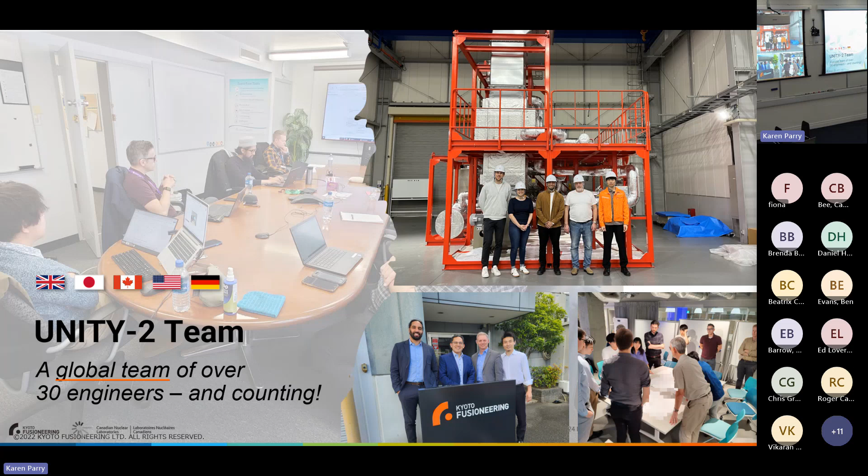It's a global team working on this project. That's some of the team from Canada in Japan. That's our facility in Japan. And this is us working in Canada at some workshops.

And if you are in the fusion sector, even if you aren't and you want to get into it, there's a conference called Tritium 2025, which is next year in Ottawa, and there'll be a site tour to Unity 2. It'll be about the midway point through construction, next September. So please go and have a look there. We are on the organising committee, I believe. So yeah, you can get some further info if you want it.

Key supporting activities in this area: on the blanket side, Unity 1 and Unity 2 are testing the core technologies, but what we're interested in from the blanket side is where the market is now. So what do we do with those technologies? How do we actually design those systems into customers' needs now? That really comes through looking at things like neutronics, tritium transport, reliability assessments, safety assessments, thermohydraulic and thermomechanical analysis.

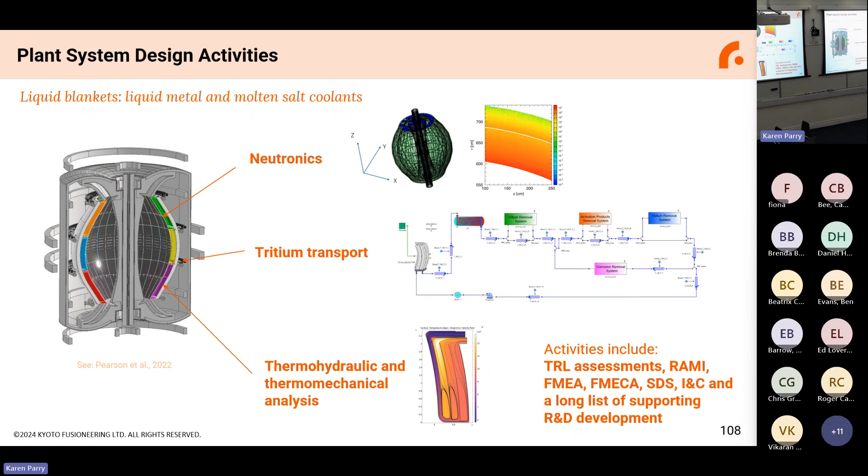And my team in the UK, which I'll come to in just a second, are working on a lot of these areas now to actually apply our technology and take it to market. Because you can't just say here's my piece of kit, great, you've got it - you have to actually work out a way to integrate that with people's machines. And we also want to steer the market in a certain way, making sure people say yeah, that technology looks like a really good choice, you guys have done a really good job working out how that's going to work, so we're going to go with you.

And we also have a materials development program where Japan is the world's leader in something called silicon carbide composite technology, which is a very high temperature potential operating material, about 1,000 or more degrees Celsius. This is one of the things we're trying to develop to see if it's possible to use this material for fusion. We have a dedicated program on that.

On to the very last slides now. Just wanted to give a sense, since we're in the UK, of what we do here. I've got a team of about 14 people in the UK now, and we're currently hiring for a couple of positions in the engineering team. So that's kind of the size we're at. We're about 120 in Japan, about 4 or 5 in Europe, and about 5 or 6 in the US. So the UK is our biggest subsidiary.

The UK is a world leader in fusion. I really hate to say that, because the last government really liked to say we were world leading in everything—we'll see what this new government does. But in this area, it really is true. Culham down the road is an exemplar of that. We've got a very strong national programme and government commitment to this area.

UK AEA hosted the European JET facility and also pioneered its own approach with MAST Upgrade, which is where our gyrotrons are now supporting, by the way. So at MAST-U in Culham, our gyrotrons are waiting to heat plasma once that's up to speed.

It's also been a pioneer internationally on the regulatory side, looking at how to regulate fusion in an innovative way, and also on the research side, including Oxford University. There's a huge materials focus at Oxford, as well as plasma physics. You probably know about that, but they're key areas for this, particularly at this university.

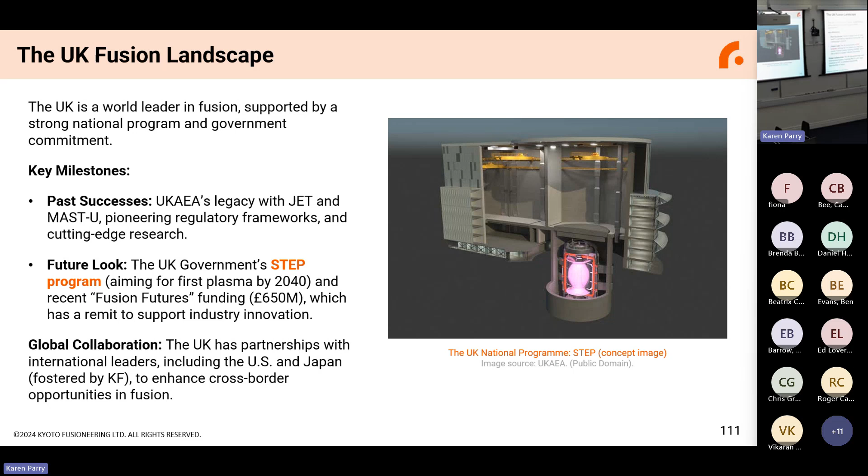Now, what do we do in the UK? Our specific mission, as a subset of the company's mission, is—after launching in 2021—to lead fusion innovation in the UK and support development of the UK market. So we're trying to steer things in the UK towards what we think they need to be, and also provide engineering and technology development and deployment here.

We sell things into the UK like tritium systems, technologies, gyrotrons, but also engineering services. Most of my team in the UK provides engineering services to the UK market, but we're also developing our own capabilities. I mentioned earlier on the blanket side that we're developing techniques in modelling, thermohydraulics, etc., to understand what our own technology needs to be able to do, pushing the bar higher.

And our purpose is really to drive growth over here. So the new Labour government will like that, because growth seems to be the word they...